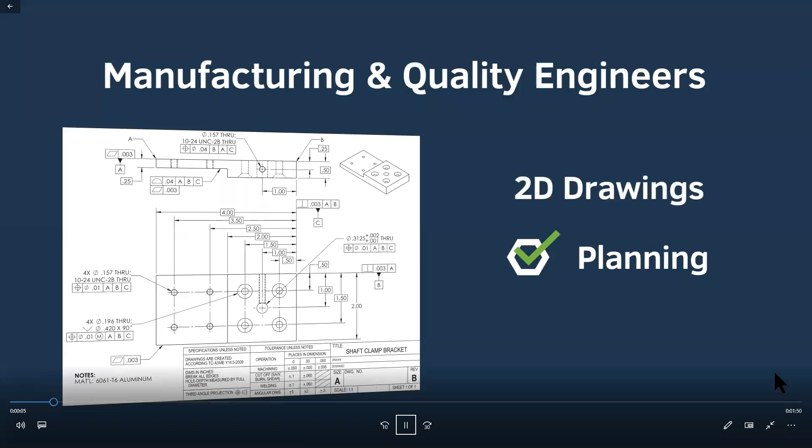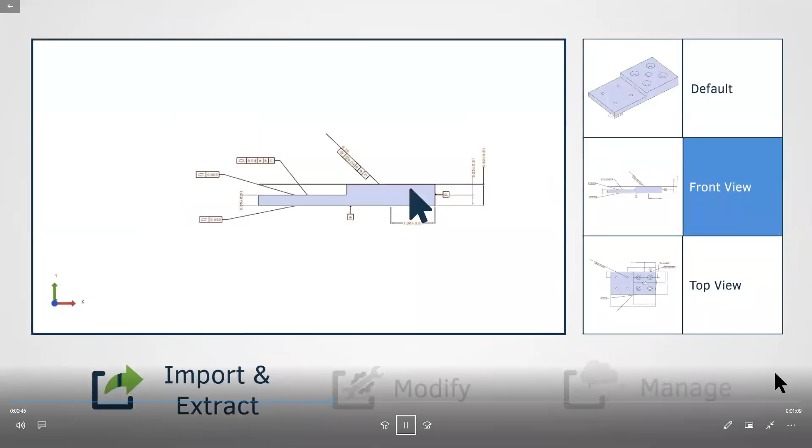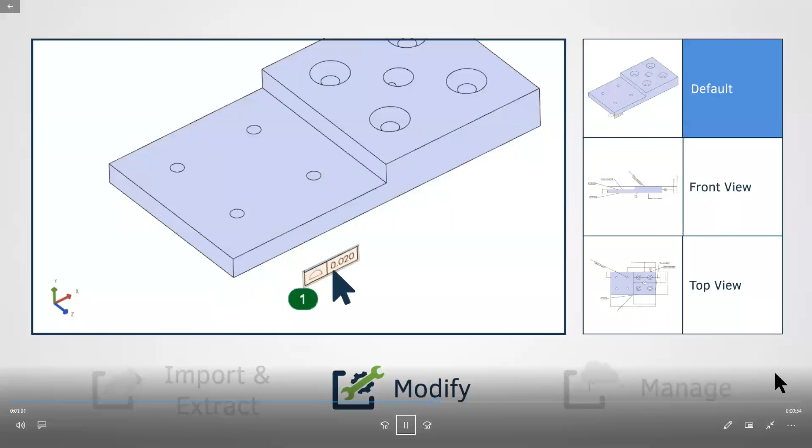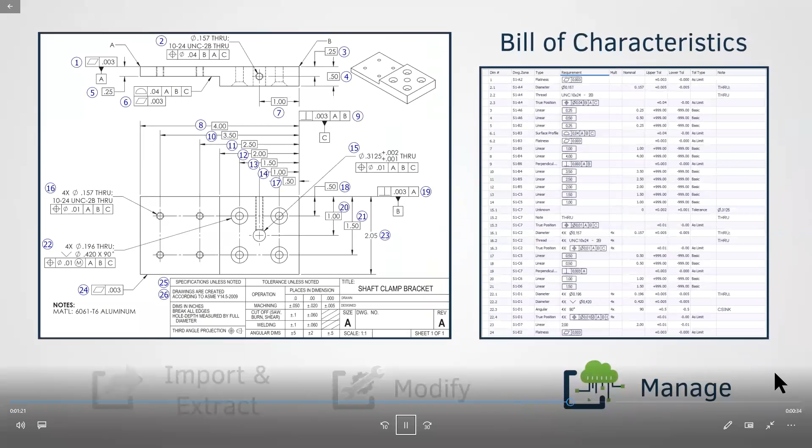Manufacturing and quality engineers have traditionally used 2D drawings throughout the planning and inspecting process. Now, with the rise of Quality 4.0, many expect their suppliers to use a 3D model-based definition. That's why High QA has made it simple to incorporate 3D models in your manufacturing quality process. Our integrated MBD module with Inspection Manager lets you intelligently import, extract, modify, and manage any native 3D CAD data quickly and efficiently. Importing and extracting information from MBD data is as simple as opening the 3D model in Inspection Manager. The 3D model, GD&T, and other PMI data is automatically extracted from all major CAD systems and file types. Modifying GD&T and PMI data is as simple as toggling off or on. Our drag-and-drop interface from model to views gives you ultimate control over your 3D data. From there, managing this data is straightforward. With one click, Inspection Manager automatically converts the MBD views to ballooned 2D drawings with a complete bill of characteristics, ready for use in all of your quality requirements, processes, and workflows. You can easily create a fully annotated 3D PDF for visualization, or convert the 3D model into a STEP file, supporting your other manufacturing and quality process needs. Integrating 3D MBD data into your quality process doesn't need to be complicated, and with Inspection Manager, using 3D MBD has never been easier. Experience the High QA difference. Contact one of our quality specialists today.

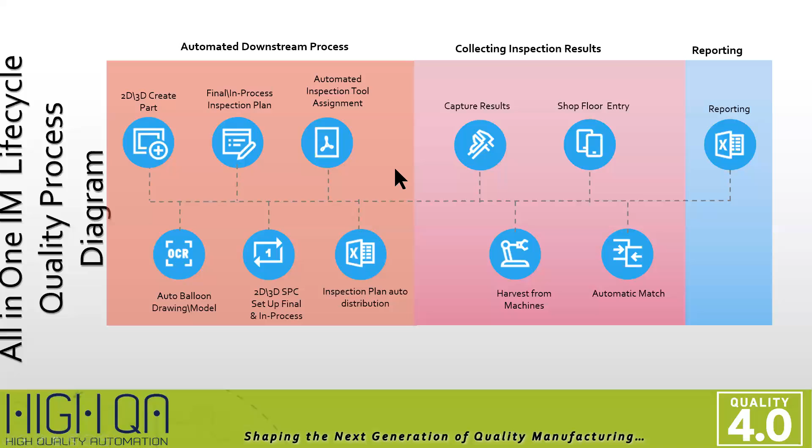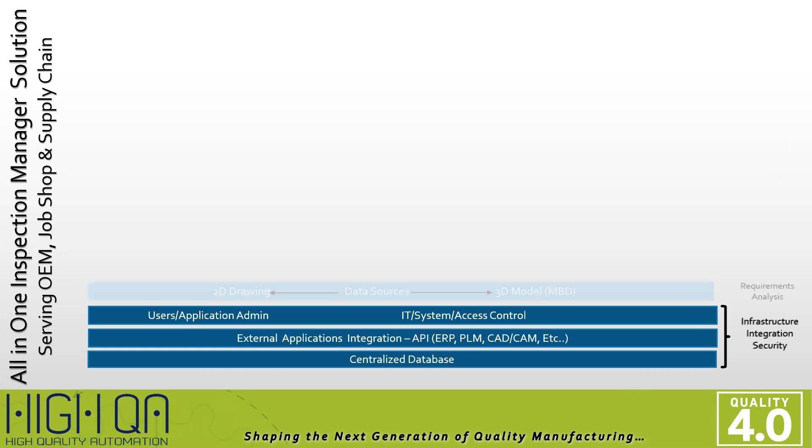So this is all in one, from 2D, 3D, all the way downstream to shop floor data collection, and then comes the reporting. In a nutshell, Inspection Manager is a database-driven application. We have a layer of API to communicate with any other enterprise solution. We have very robust access control and user management. And here comes the requirement analysis, which comes from a 2D or a 3D source.

Today you will see how this requirement analysis on the 3D is handled and how it gets converted into 2D, to do all the process that you need. You can use our APQP, which is integrated, and the PFMEA function that enables you to do everything from A to Z, assign it to the shop floor or outside supplier, and automatically collect data.

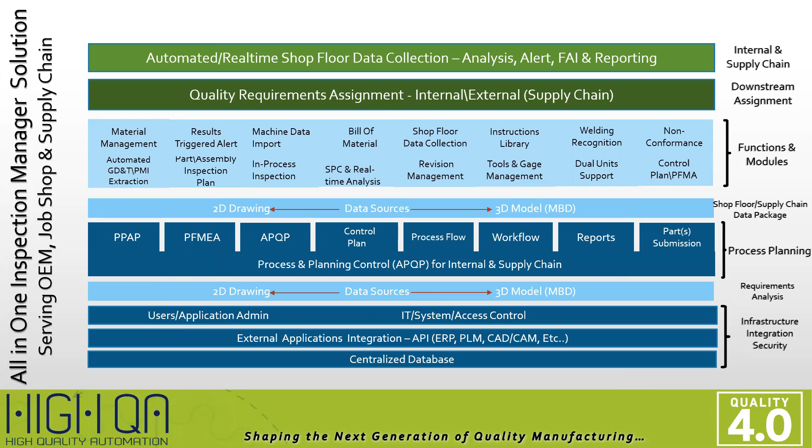You get the data analyzed, alerted, and create unlimited reports that you need. To give you an idea, when we say we serve the manufacturing industry, it's from the smallest job shop all the way to enterprises and OEMs. You can see here Lockheed Martin, Bosch, Mercedes, Rolls-Royce, and many other large companies, as well as mid-size and small size.

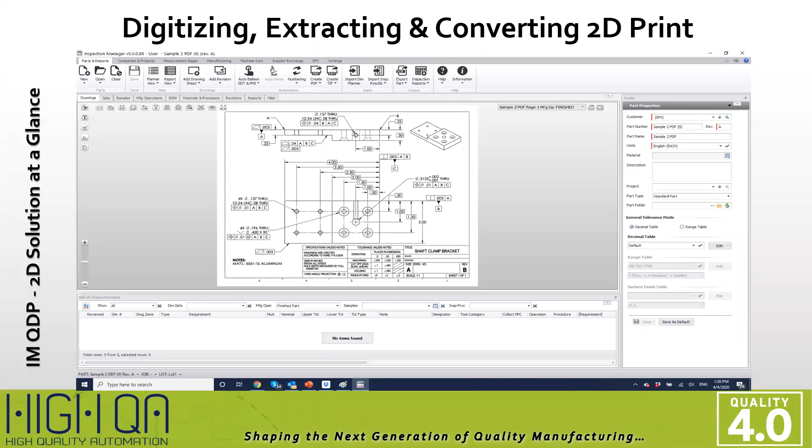As I mentioned, we cover 2D and 3D, and we'll have the opportunity to see the 2D a bit later. When you click a button, everything is extracted automatically, enabling you to do everything again from A to Z with one system. And this is, of course, the 3D, which we will focus more on today.

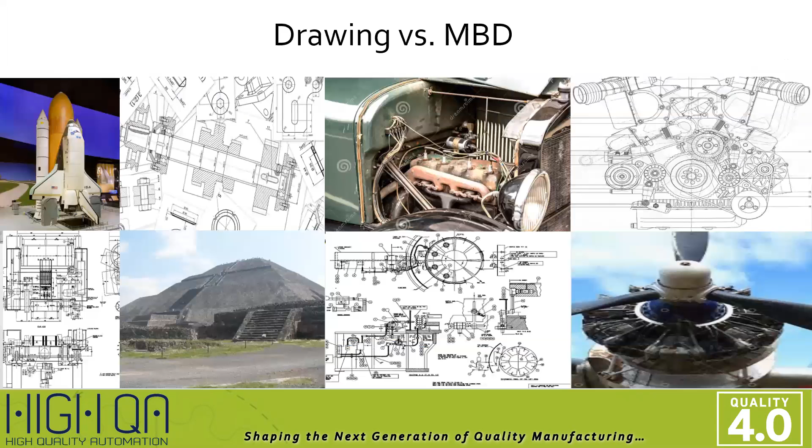So when we talk about 3D, we talk about drawing versus model-based definition. From ancient times, the pyramids and the classical Parthenon, up to cars, airplanes, and the space shuttle of today, I think technical drawings have been playing a fundamental role in constructing humankind's progress. They carry clear and concise information without misinterpretation or assumption, remaining the traditional way of instructing what to make and how to make it.

A set of technical drawings delivers all the necessary information explicitly, requiring no further instruction. The American Society of Mechanical Engineers, known as ASME, issued a standard on annotation of 3D models and utilizing 3D data as manufacturing information in early, I think, 2003, anticipating 2D drawings being phased out. We are talking about 17 years ago.

And I can share with you that 14 years earlier, at the STEP convention in Chicago, one of the STEP executive members stated the following: in 2 years, meaning 1991, drawings will disappear. Guess what? 85% still bubble their prints manually today.

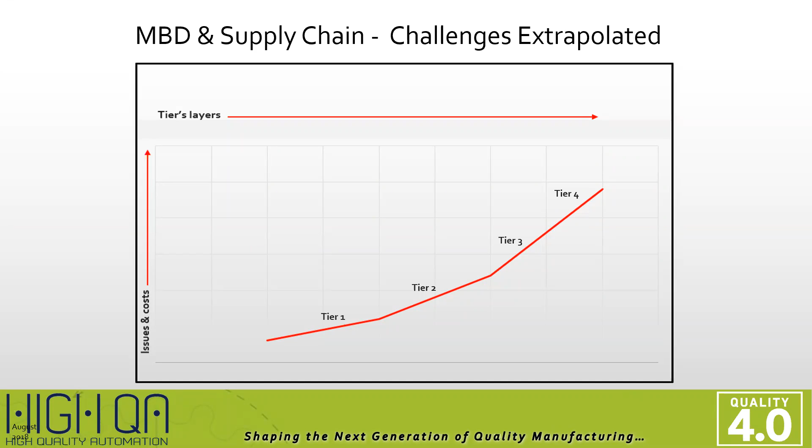And why is that? If we take a look at an even more challenging scenario, an OEM or customer, the part is made by an engineer or a group of engineers, and then they outsource it. It goes to tier 1, and tier 1 propagates it to tier 2 and tier 3, and then maybe tier 4.

When it comes to tier 4, the question is what happens with this MBD? What will those gentlemen do with the MBD, what native file are they going to get, how are they going to handle it? It's a big question, and this is why this industry is still highly struggling.

So they may get a STEP file from tier 3 with a couple of drawings. They may get from tier 2 only the MBD, and it's a big challenge all over the place. When we talk about supply chain, we can talk about one of the biggest fiascos in the industry: if you look at who actually initiated the MBD, it's not the people who make the drawing.

It's the high level engineers who said, 'Oh, we don't need drawings.' Yes, you don't need drawings, but the guy who makes the part or inspects the part needs more information. On the OEM side, you create the MBD, you put limited dimensions, critical dimensions, but when it goes down to the tiers and somebody needs to make it, that's not enough information. This is a huge challenge that has elevated a lot of interpretation and a lot of issues.

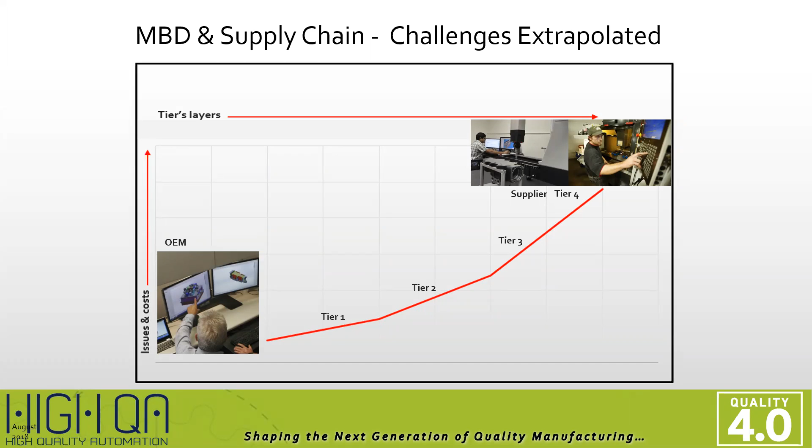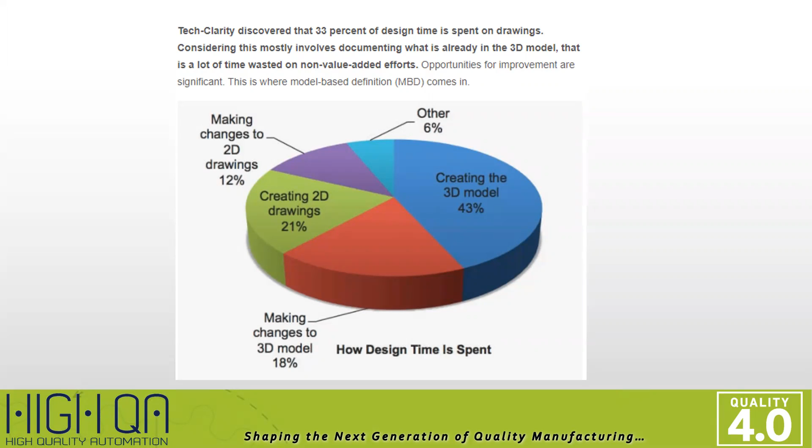So this is what they discovered, but this is what we discovered, and you can read it: that saving in time is not passed on to the manufacturing and quality groups. Those groups still rely heavily on 2D drawing to manufacture, inspect, validate, and report on parts. The creation of 2D drawing by quality teams not only eradicates any time saving, but in many cases can double or triple the time supposedly saved.

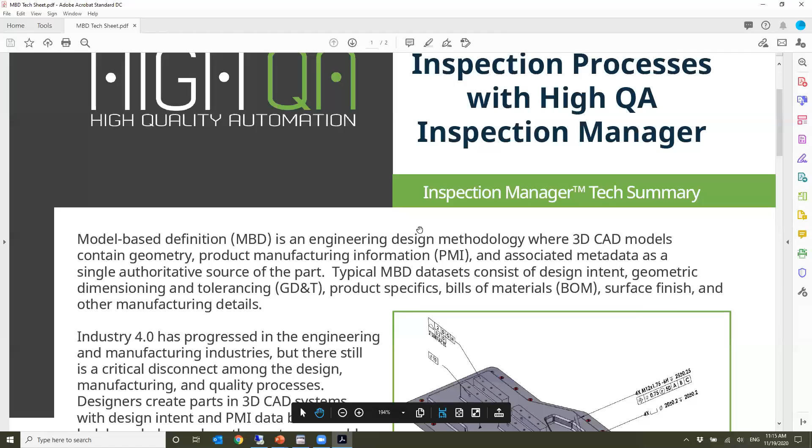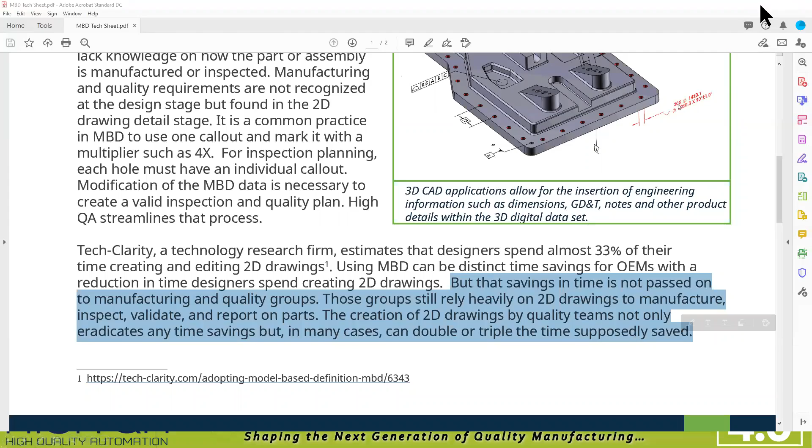So this is a great discovery when you look into the OEM side, but somebody needs to make the part, somebody needs to inspect it. By the way, the people who discover it is High QA. And you can read here in our tech sheet, I think there is a quote here, from Tech Clarity, as you see. And this is a very straightforward conclusion, and probably all of us know it. So that's kind of what we talk about saving time, but it is not really saving time.

Talking about the MBD challenges, looking to the left side, in MBD, you can get multiple native CAD files, CATIA, NX, ProE, and many others. Now, when you get it in many cases with limited or just critical dimensions. It might be sometimes sufficient, not necessarily when you go to first article. And one of the biggest reasons is because engineering guys who design the part, and I don't blame them, they have no idea who is going to make the part, how this part is going to be inspected. They don't know how many operations you're going to have, what is in-process inspection, what tools we're going to assign, what criticality. It's not there.

So there is also in the MBD a lot of non-relevant model-based data that you probably don't need, but it makes the model very robust in terms of data that I don't need. What about trusted import? What do you use to bring native CAD into your system if you have it? Then you have limited visualization of views. I mean, that's what I spoke about: hey, this is the model, and not necessarily I have the views. So you rotate it, you take a screenshot, you use pen and pencil. And then if you get a native file, you need a step file, and that step file serves you to do manufacturing and to do quality with CMM or VMM. And dimension location - when you rotate the model, those dimensions that you may see in this orientation represent nothing. You rotate it to see where the dimension is, but it disappears.

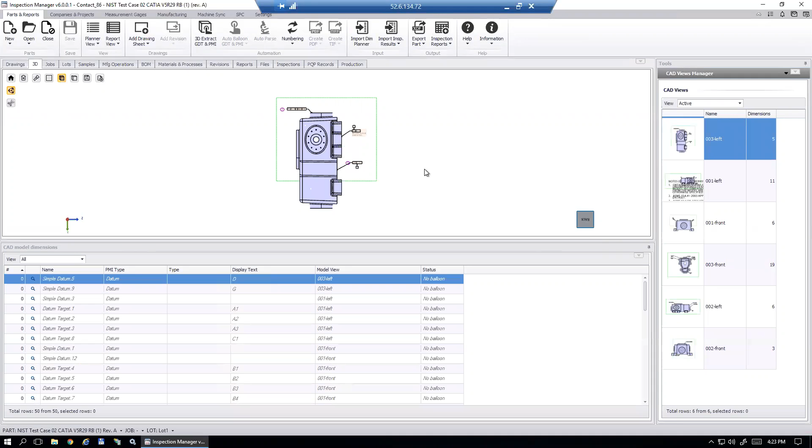And once I'm clicking open, see what happened. We take the model, we take with the model all the views, okay, and actually convert them to Inspection Manager environment, which you will see shortly. All the information that is in the 3D, you're going to see it here, okay? And here it is - not just the model, also all the views that were created there. Even text that you may want to see there, and you can see here all the views. We will jump into the views shortly.

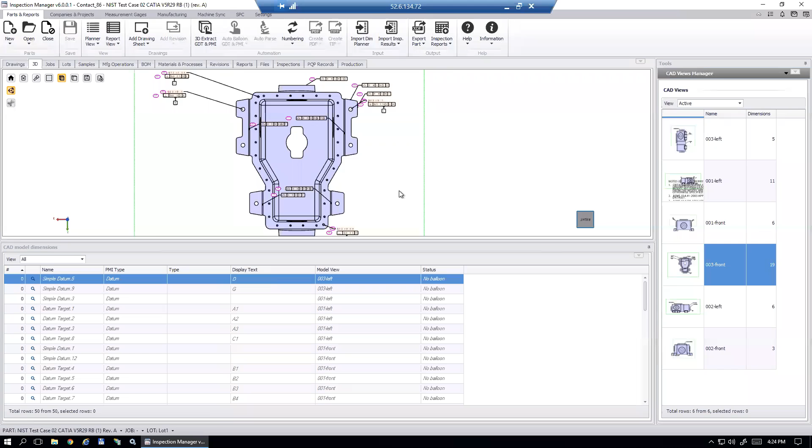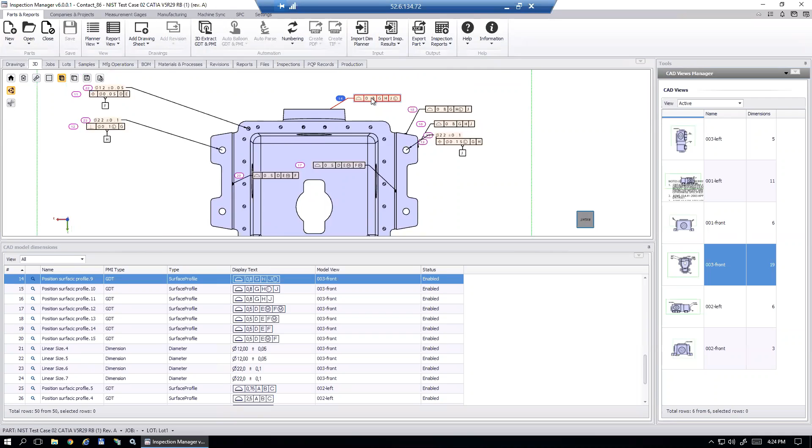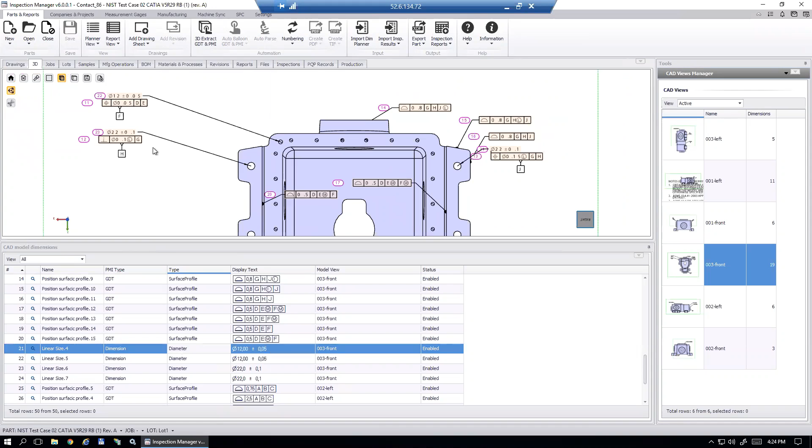Now, when we look into this view, for instance, or let's take this one, you can see what happened here - all this information, all the GD&T that came with the 3D. I'll click on balloon 14. It's already ballooned, but this balloon is not the quality process balloon - this is to help you modify and clean the model if you need it. But if you click here on 14, you can see exactly what was recognized. Here is the exact display. We'll click here, you can see this is surface profile as well. You can click here, it will take you to the relevant balloon number, which should be here, 21 somewhere, or it's in another view probably, which is also good. We'll click here, you can see balloon 23, you have the diameter. So all the information is already extracted automatically into a 3D bill of characteristics. Let's not be confused between 2D and 3D.

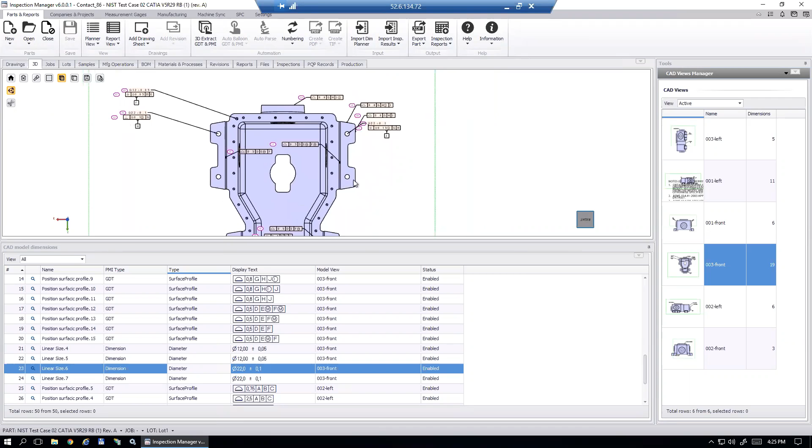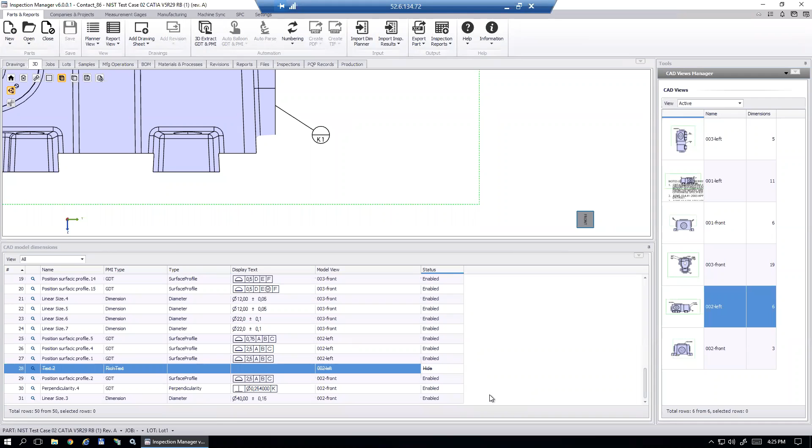This enables you to do a lot of things when it comes here, okay? If I, for instance, as an example, try to find something that we might want to clean here - let's say this is a symbol probably of an assembly, and you see text point 2, rich text, and I say I don't need it, although the 85 diameter may be required, but just to give an example. So this is enabled, so you can go and just say hide it, okay? So it's gone. So you can clean your model of all irrelevant information. I'll bring it back. Show, okay, and it's back. So you can do it in any part of your model and you can modify.

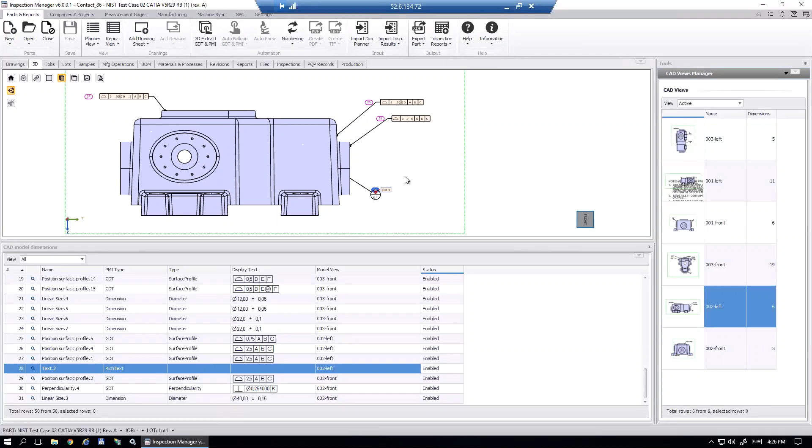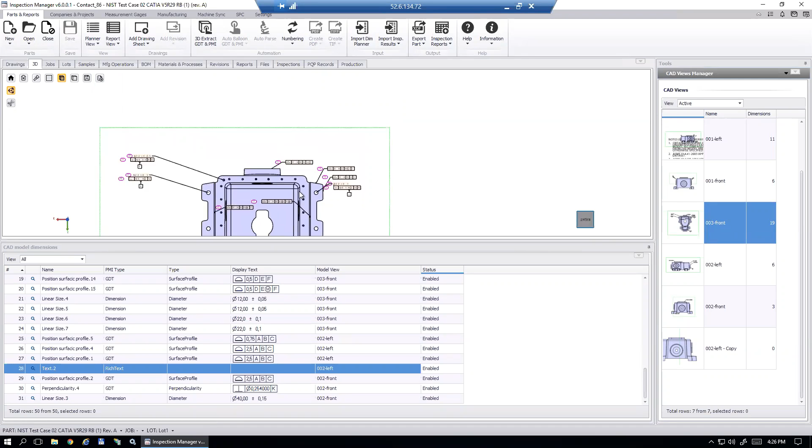Let's say that you would like to see another view orientation. So you can, of course, it's a 3D - you say look, I would like to have this orientation, okay, as an example, or click here. And this is my new view. And you can go and add this view to your views. And you can see that this view is added now here, right? This view is added. And I can go to this view and say, look, this dimension, for instance, which I don't see right now because I need to do something - let me go like this and I can rotate it. Said, oh, this is here, but now I cannot see it in this view, okay? So you can take this dimension, as I'm doing here, and you can drag it to the view that you created, and now it's already here in this view.

So this is how easy you can go and modify and work between views, clean the model and prepare it to your quality process.

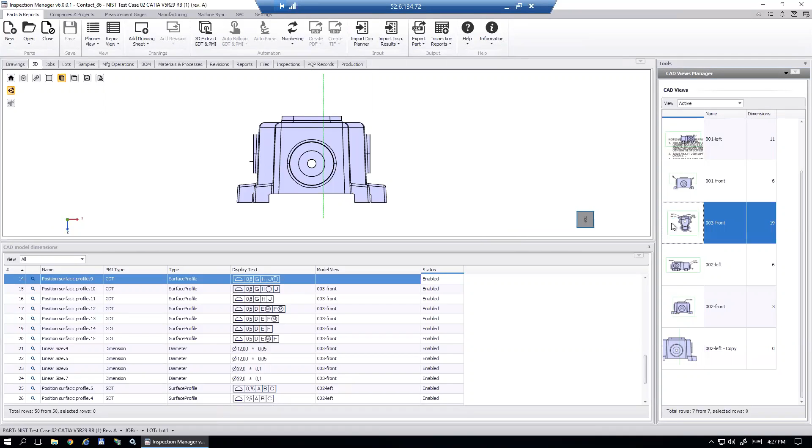The other thing you can do, you can export it to a step file. In many cases, when you get a native file, there is no step, but you need a step file to import to your CAM system or to your CMM machine. So you can click and export it to any of your continuous processes using step file.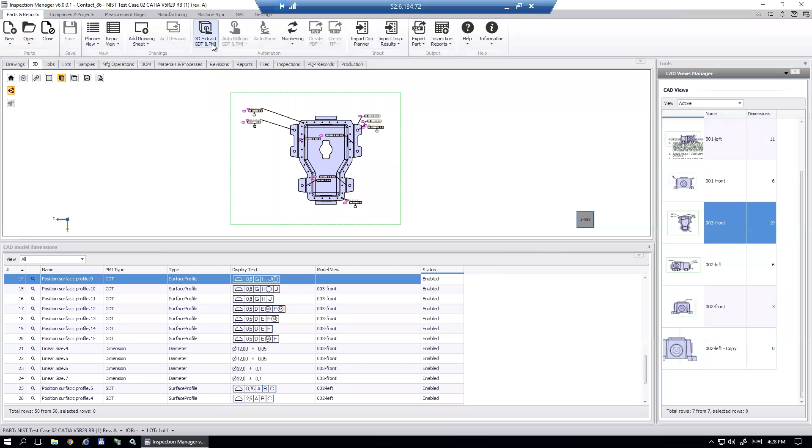Now, when we talk about what happens next, at this point I can go and extract it into GD&T and PMI on a 2D level. One click and see what happens now, if there will be no glitch, of course. Seems to me that it's working good.

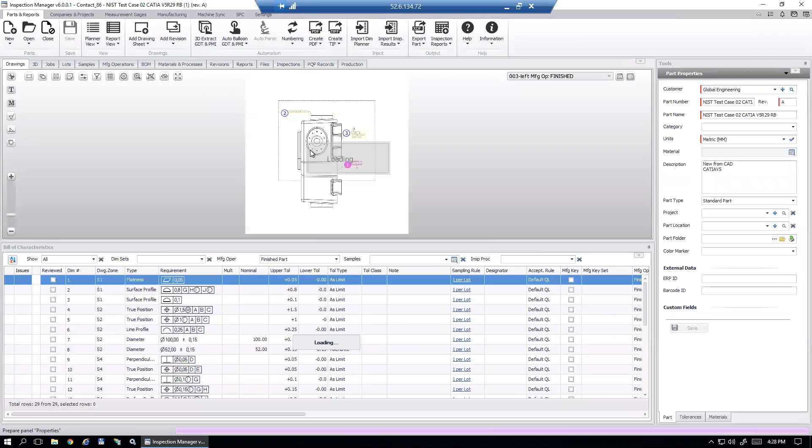So what happened now? It's almost magic. Now all this information is converted into 2D, and now you can see the bill of characteristics here, created on a 2D level. And you see all the views here that were created. And of course, you will be able to take these views and combine them onto one page.

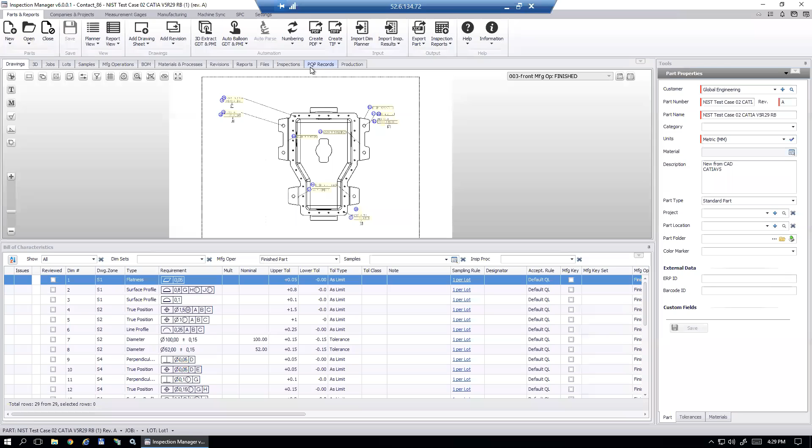But now, because I have these views in a different way, I can go and re-balloon it. Remember, the balloon on the 3D model on the MBD was there to help you recognize and modify. But at this point, I can go and renumber everything, so all the balloons are now really in the right order, the way I need it. And I can do all I need here.

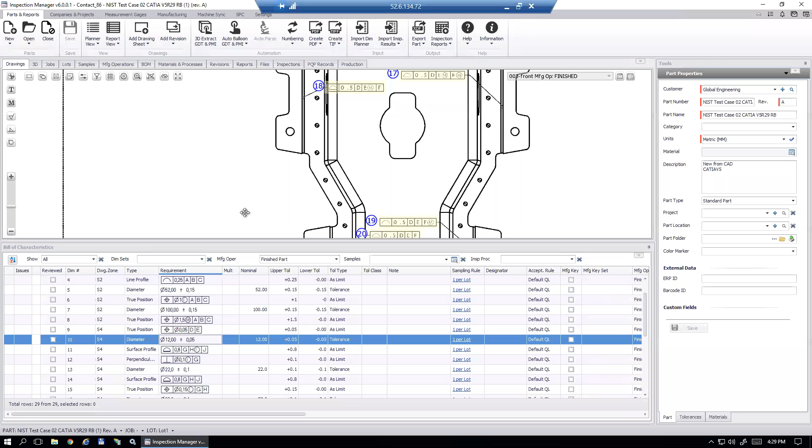For instance, if I go to this surface profile that you can see here, or let me take something even more clear. I'm looking for a diameter, which might be here. Here is the diameter. And you might have multiple holes. Let's say I have here not one, but 4 times diameter 12.

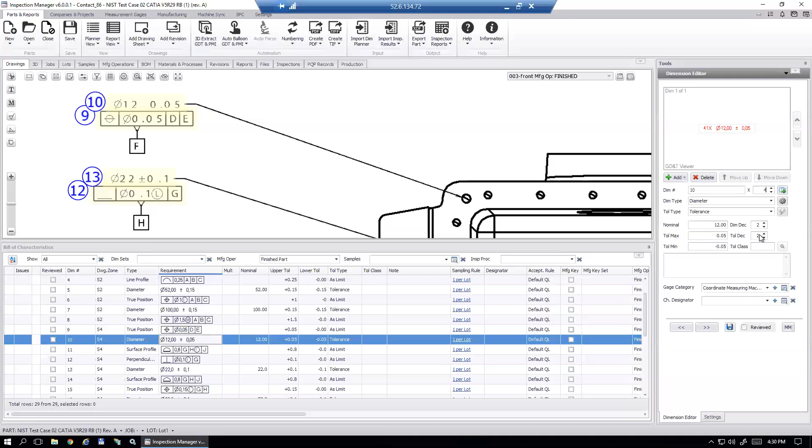Then I can go here and create the multipliers on the fly with no issue at all. So I can go here, as you see, and multiply it by 4 - not 41, but 4. Click save. And now you see the multiplier here in my inspection plan.

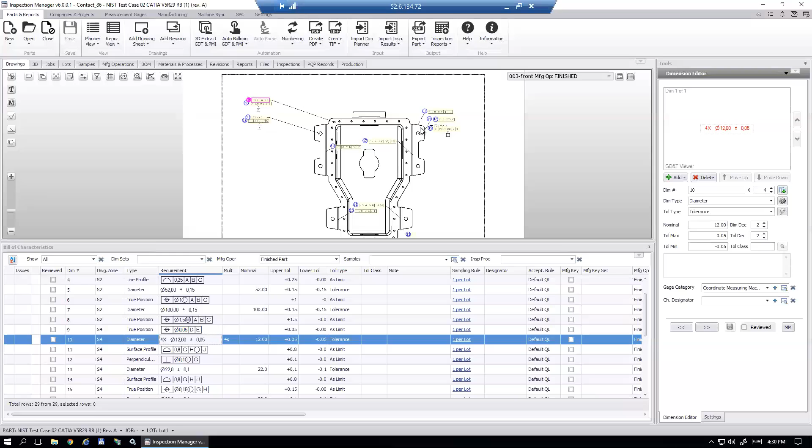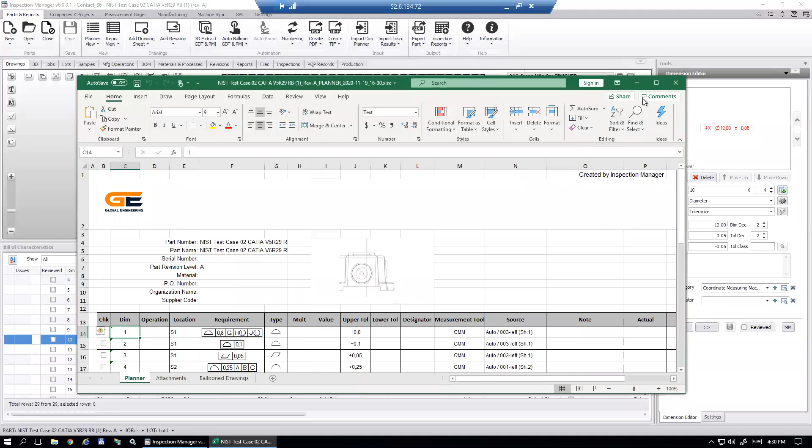So when you are in Inspection Manager, after you converted it from 3D to 2D, you have the ability to take it to the next steps, all the way to the inspection plan, in one click. And here's my inspection plan for this part with all the requirements you see here.

And I can do much more. I can designate and say, okay, this dimension 10 is critical safety, I need to inspect it with a depth gauge - I know it's not right - and it's added to my bill of characteristics. So everything can be done from this point all the way to inspection plan, in-process inspection, data collection, and so on and so forth.

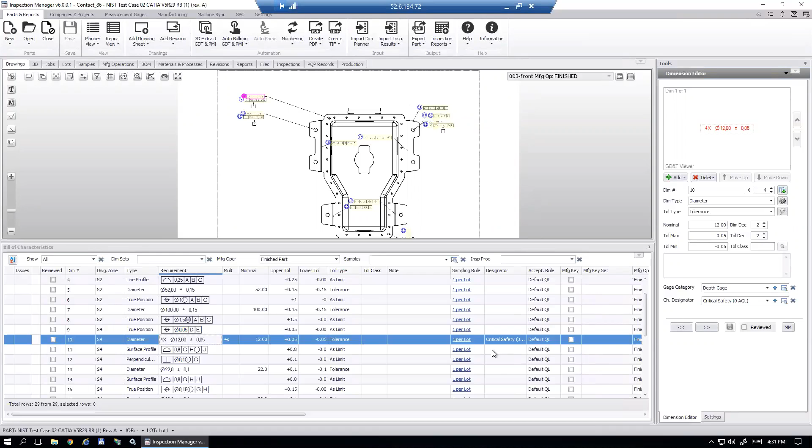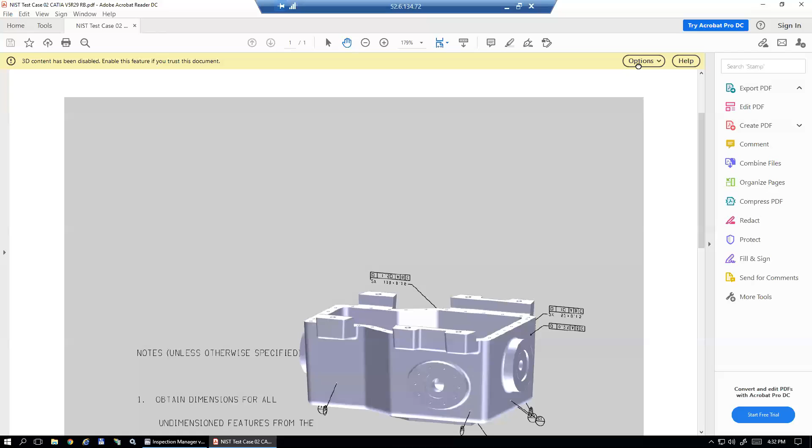Another thing that can be done, which is very important - if we go here to the 3D side, where we were before, this is the same application. You didn't have to go out, it's the same application, same database. I can now create even a 3D PDF if I'd like to share in a visual way, because I don't need unlimited number of data conversions. So you can have it here - let me save it because it's a server. So now you have it here, and anybody can look into it on a 3D PDF directly from there.

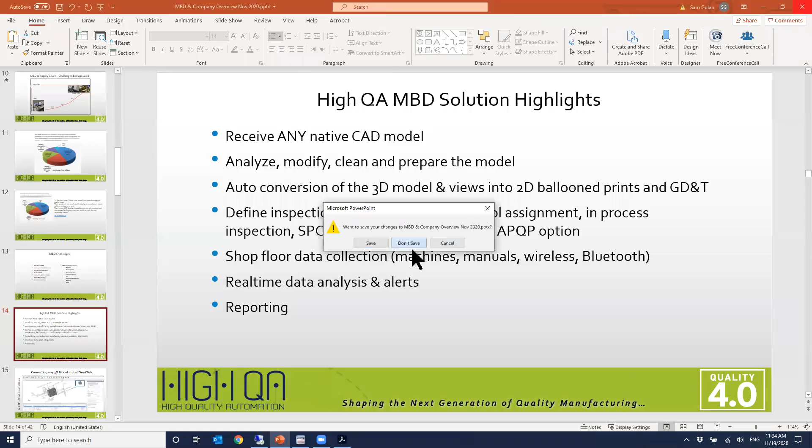If I go to, this is 5.1, not 6.0, so this is a working version with maybe 700 some customers. Let's say you converted the PMI with no data, because there's a step with no data, and you'd like to add dimension. You can definitely do that, but after you extracted it into a 2D.

We are not doing it on the 3D side for two reasons. One, you don't want to change the model that converted, because you don't want to touch the source. There will be discrepancies, and then the auditor will say, show me your source model, show me the converted model. You don't want to do it.

But here I can go now and say okay, I'm adding a dimension, and I'm going here and saying okay, playing with it. Linear dimension, the nominal is 4 and my tolerance is 0.04. Click save. I can drag it here and say, okay, here is a dimension. You see what I'm doing?

And I can even add a line if I want, any way, shape and form. So you can add a line, say okay, this is between whatever, centers or whatever you want. So yes, you can add. Once it's converted into 2D, you are free to do anything you want. You can add lines, add dimensions, designate, you can even add an image if needed, because sometimes it's needed.

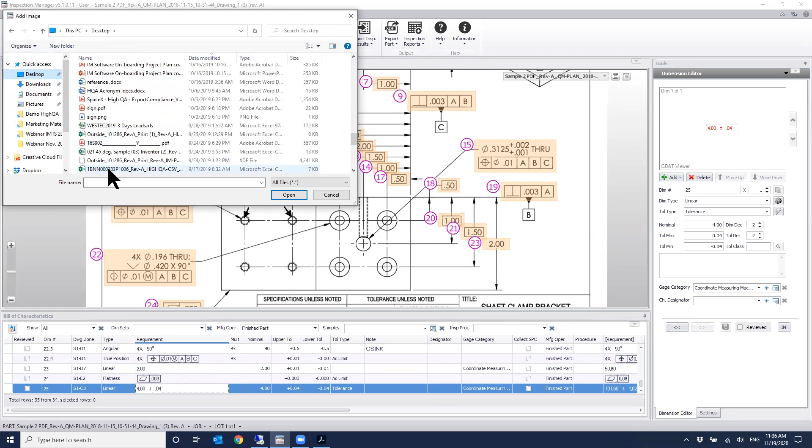Let's say I'm taking this and I don't know what I have on my desktop, if I have any image, I'm not sure. Anybody can find an image. Well, some PNG, I don't know what it is, I have no idea what it is. But you can add an image here, or any type of data you can think of can be added here.

Okay, and then we have one more in this series. The question is, you are creating a 3D PDF.

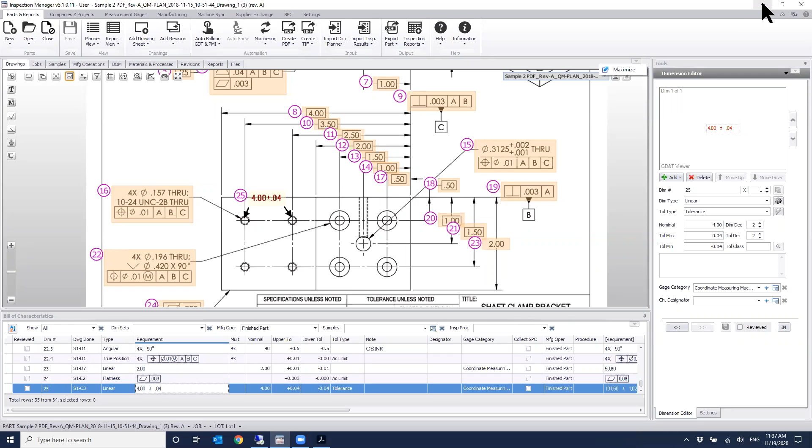Yeah, I showed it, I'm going to show it again. Let me go back here and open another file so we know. I think I picked CATIA here, but let's open another one, a different CAD model. Part file, okay, and here is a part file.

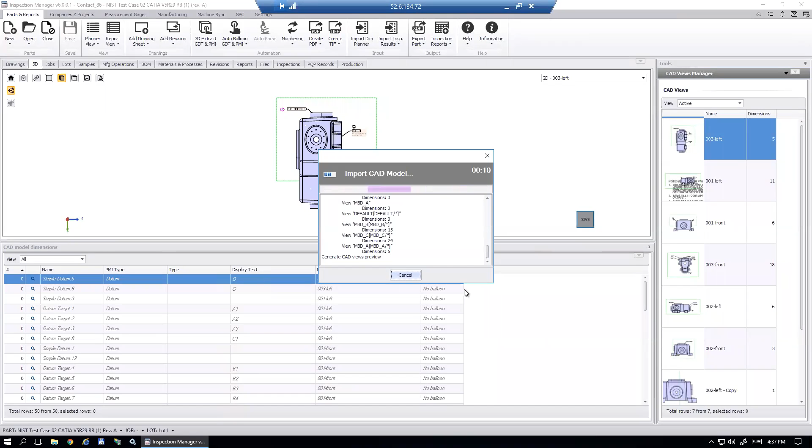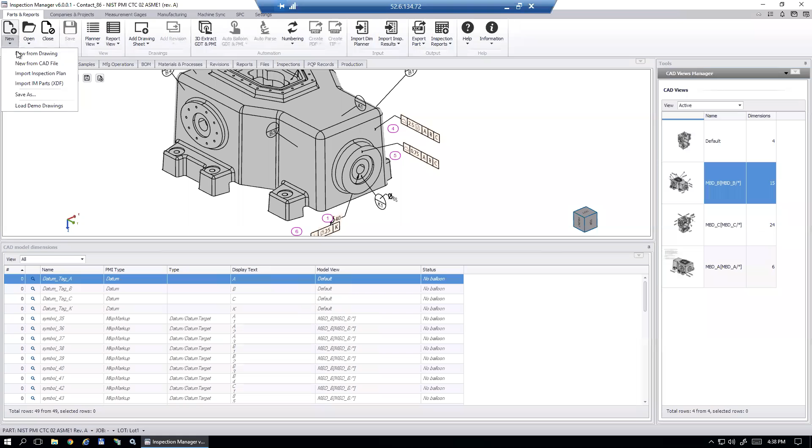Same idea, a model with multiple dimensions, model view, whatever we have here. Looks the same, I want to find something else. But here's another one that has it, it's a different model. Let me open another one that looks a little more crazy and boring.

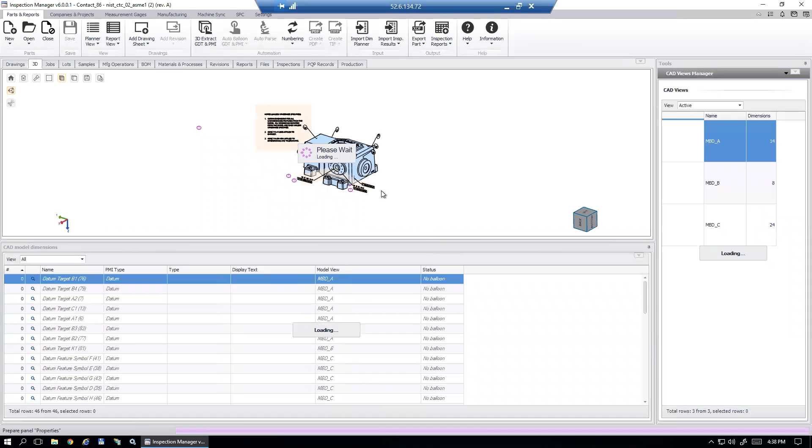This is solid, PRT, I don't know what we have in the step file. Trying to find out, I hope it's a step with some dimensions. Oh, another one like this. But this is step, as you see here, okay? And even step can come with all this information.

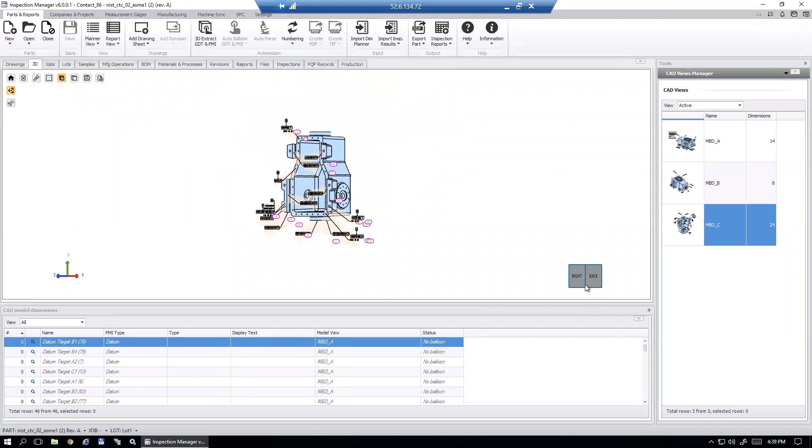Crazy. And now it gives you the idea why views are important. If I make it a little smaller here, and I'm saying, okay, I need this view or this view, right? This is crazy. I mean, what are you going to do with it if you cannot break it into views, move dimensions from one view to another?

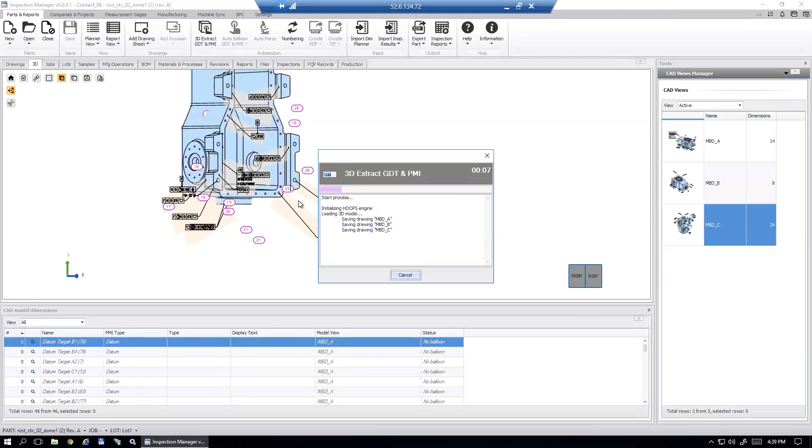But creating a PDF out of it, I'm extracting it, of course, first to a 2D and all the bill of characteristics, as you can see shortly here. And now you can see it with all the views here, right? Whatever views we had. And I'm creating now a PDF, 3D PDF.

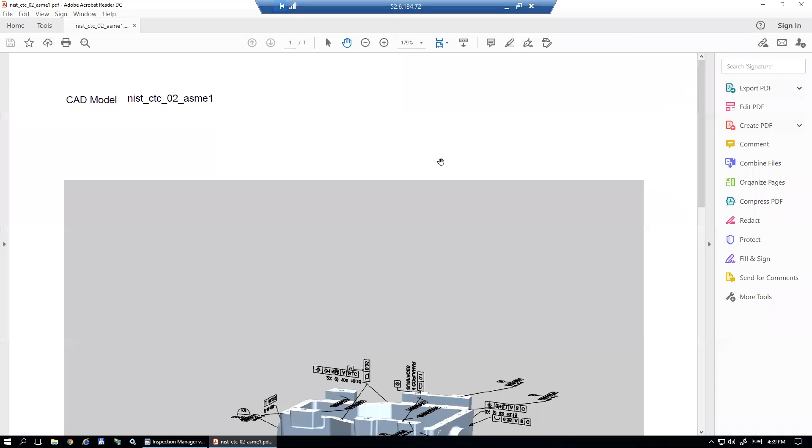And here is your PDF, okay? And you can see it here, and this PDF, it's really an option, trust this document always, but it always appears. So now you have a PDF, okay?

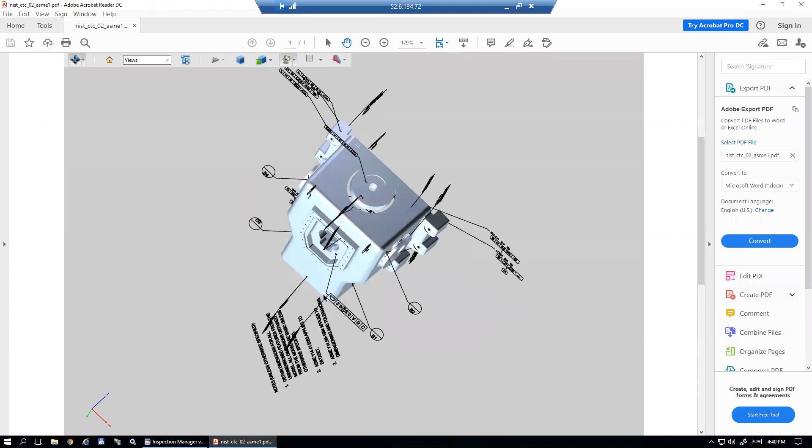So yeah, we can. One of the things we need to fix, as it's beta, and I mentioned we are cleaning, you're gonna see here on the PDF, also the balloon number that came with this PDF. But that's another layer we are fixing right now as we speak.

Okay, we're all caught up with questions right now. Okay, sounds good. So again, let me give you maybe another 2 or 3 examples.

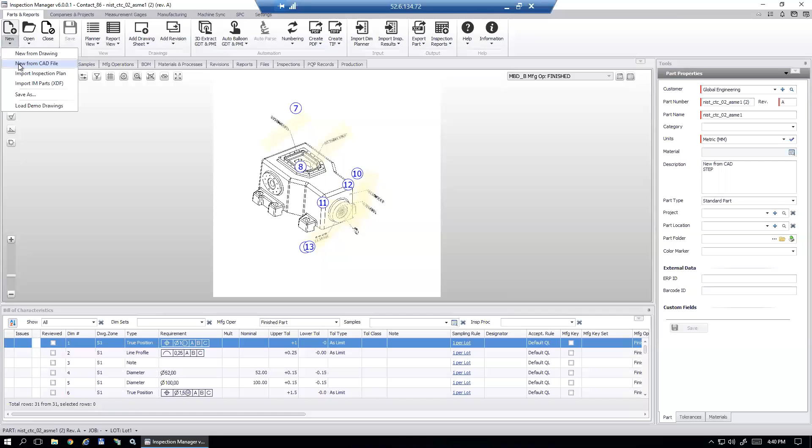I need to find it somewhere. I need to find it somewhere.

The idea is that we were involved in a session in Netherlands with a company called ASML, one of the largest conglomerates in Netherlands. About two years ago, they decided to send their suppliers only model-based definition. This model-based definition actually almost killed them and their suppliers. Because they have many suppliers using our systems, they asked if we can help them go into their suppliers and help them with 3D. And actually, this is what we did.

When we presented it about a month ago in Netherlands to about 1,000 suppliers, it was a very positive shock for them. And this is the part that we presented, as far as I remember.

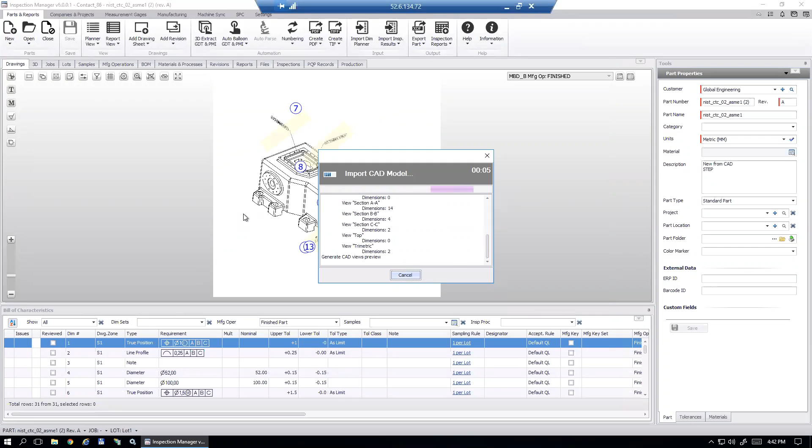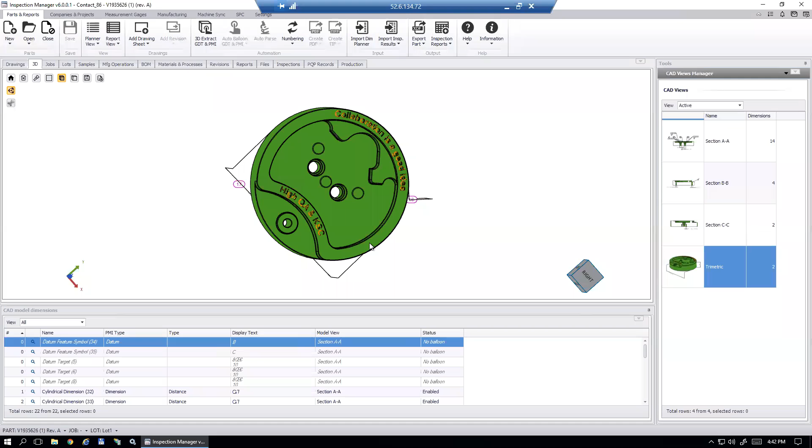This was a sample part created by one of their suppliers, and for them it was like, this is exactly what we need for our supplier. This is the model they created. If I go to this, you can see High QA and KSC - KSC is their supplier - and they created this collaboration, a good idea. They presented it in their session to show there is now a solution when you get 3D, MBD, and you can take it and really make the part without spending time on interpretation from MBD to 2D to parts to inspection to manufacturing.

So, I think in this, probably I would like to conclude. I think we answered all the questions that were asked while doing this presentation. But if there are more questions...

Yep, we have got a couple sitting down here. One is, when will the 3D option be available?

I think I mentioned the stable beta is mid-December, and people can use it. By the way, we provided our customers, new and existing, that if they purchase it at this stage - and we already have, I think, 7 or 8 users of this MBD - we provide them a nice early adopter discount, I think 30% or something like this, which is nice. The formal release is mid-January, so it's 30 days between beta and formal release. Take into consideration a week or two weeks of year-end, new year, then it's actually about two weeks net until formal release is available.